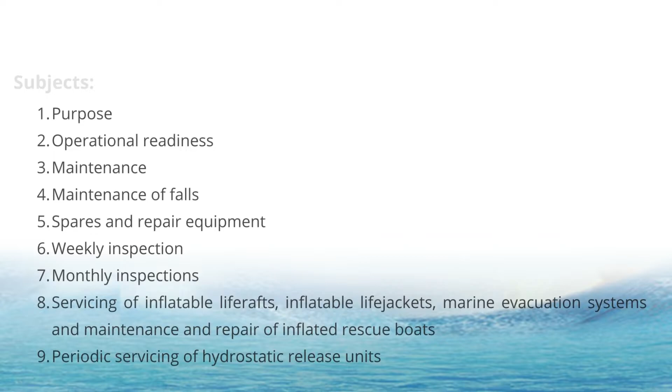The information in this video is sourced from SOLAS, Chapter 3, Life-Saving Appliances and Arrangements, Part B, Requirements for Ships and Life-Saving Appliances, Section I, Passenger Ships and Cargo Ships, Regulation 20, Operational Readiness, Maintenance and Inspections.

Marking of stowage locations. Containers, brackets, racks, and other similar stowage locations for life-saving equipment shall be marked with symbols in accordance with the recommendations of the organization, indicating the devices stowed in that location for that purpose. If more than one device is stowed in that location, the number of devices shall also be indicated.

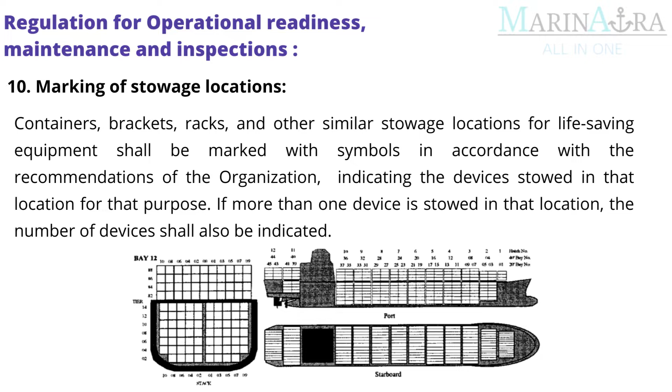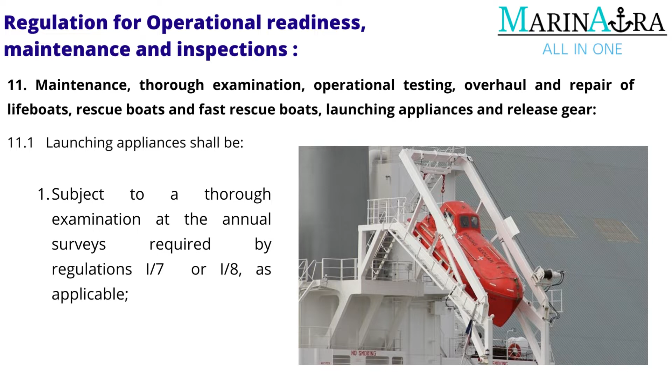Maintenance, thorough examination, operational testing, overhaul and repair of lifeboats, rescue boats and fast rescue boats, launching appliances and release gear. Launching appliances shall be subject to a thorough examination at the annual surveys required by Regulations I/7 or I/8, as applicable. Upon completion of the examination referred to in paragraph 11.1.1, subjected to a dynamic test of the winch brake at maximum lowering speed.

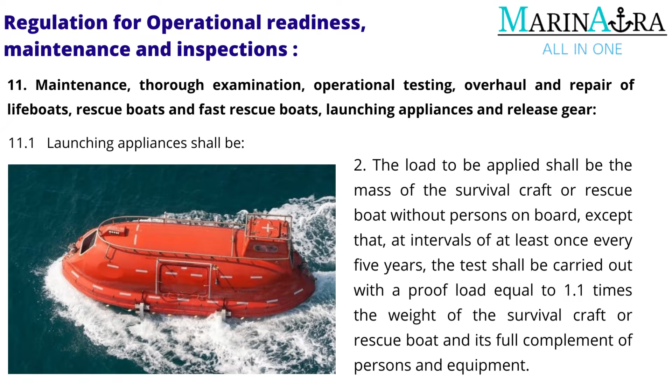The load to be applied shall be the mass of the survival craft or rescue boat without persons on board, except that, at intervals of at least once every 5 years, the test shall be carried out with a proof load equal to 1.1 times the weight of the survival craft or rescue boat and its full complement of persons and equipment.

Lifeboat and rescue boat release gear, including fast rescue boat release gear and freefall lifeboat release systems, shall be subject to a thorough examination and operational test during the annual surveys required by Regulations I/7 and I/8.

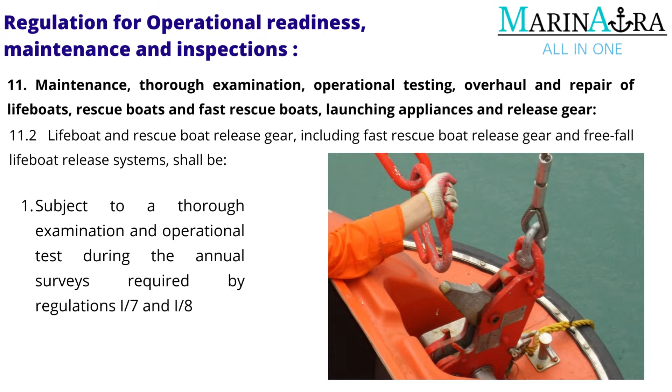In case of on-load release gear, operationally tested under a load of 1.1 times the total mass of the boat when loaded with its full complement of persons and equipment whenever the release gear is overhauled. Such overhauling and operational test shall be carried out at least once every 5 years.

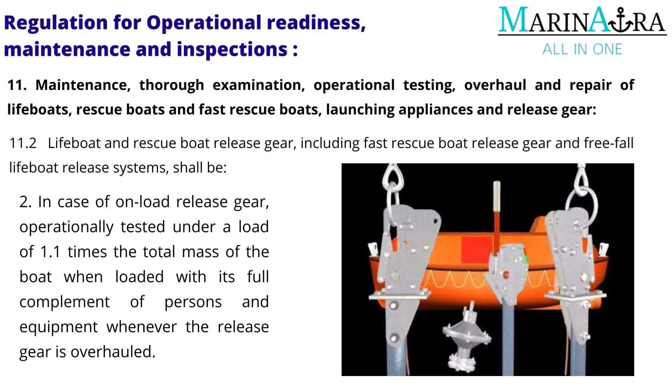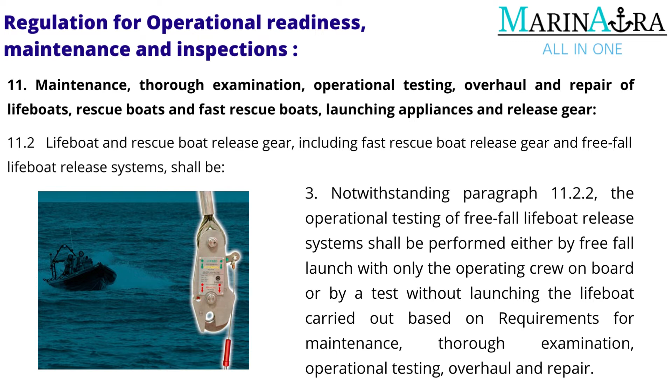Notwithstanding paragraph 11.2.2, the operational testing of freefall lifeboat release systems shall be performed either by freefall launch with only the operating crew on board or by a test without launching the lifeboat carried out based on requirements for maintenance, thorough examination, operational testing, overhaul and repair.

Davit-launched life raft automatic release hooks shall be subject to a thorough examination and operational test during the annual surveys required by Regulations I/7 and I/8.

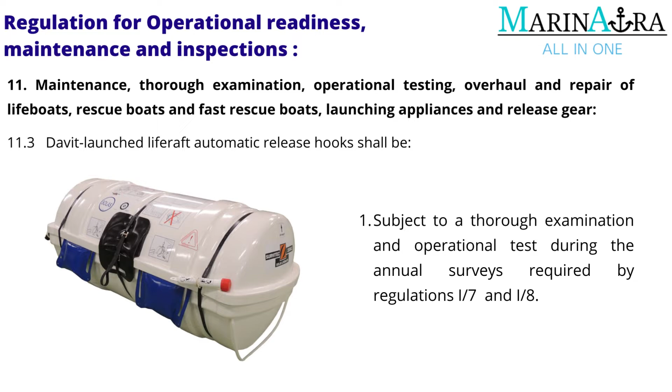Operationally tested under a load of 1.1 times the total mass of the life raft when loaded with its full complement of persons and equipment whenever the automatic release hook is overhauled. Such overhauling and operational test shall be carried out at least once every 5 years.

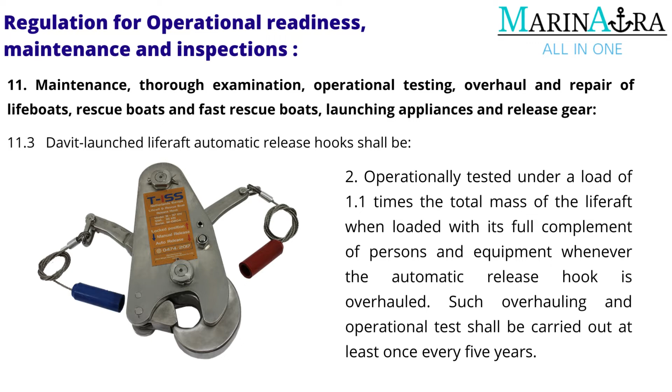Lifeboats and rescue boats, including fast rescue boats, shall be subject to a thorough examination and operational test during the annual surveys required by Regulations I/7 and I/8.

The thorough examination, operational testing and overhaul required by paragraphs 11.1 to 11.4, and the maintenance and repair of equipment specified in paragraphs 11.1 to 11.4, shall be carried out in accordance with the requirements for maintenance, thorough examination, operational testing, overhaul and repair, and the instructions for onboard maintenance as required by Regulation 36.